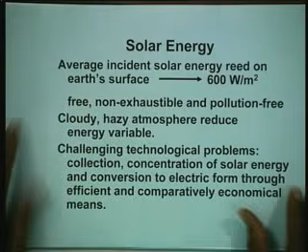So let's start with solar. As I have been telling you all these days, solar is the mother of all energy, be it thermal, hydro, wind, everything. Solar is mainly responsible. In fact, if you remove the sun, pralaya will come. Pralaya is the doomsday, the final day.

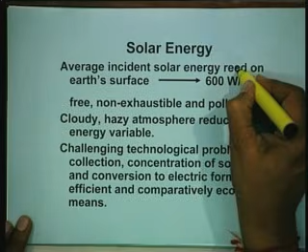Average incident solar energy received on Earth's surface is 600 watts per meter squared. It's quite a lot of energy, and the beauty is it is free. You don't have to pay a single paisa, single cent, single dollar for that. It's non-exhaustible, it will not stop coming after some time, it keeps coming all the time, and it's pollution free, absolutely pollution free. There is no pollution. Only problem is, as I said, not everything is plus with anything.

There are cloudy days. For example, in England, there is hardly any sunny day, and when there is a sunny day, they become so happy. Everybody goes towards beaches and enjoys, saying 'oh, it's a sunny day.' Here, every day is a sunny day.

Hazy atmosphere is another issue. For example, in a place like Rajasthan, if you get a thunderstorm and a windstorm, then the visibility goes down, and on certain days you have to start your vehicle headlights even in daytime. That reduces the energy available. It won't remain 600 watts per meter square on such days when there are clouds, it's raining, or there is a storm.

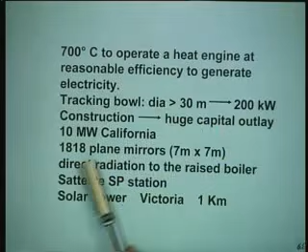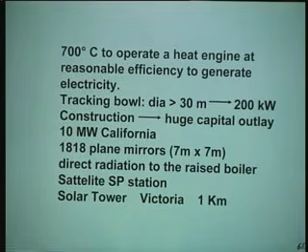1818 plane mirrors, look at the size, 7 meter by 7 meter, direct radiation to the raised boiler, and the steam is formed. All this energy is directed towards that raised boiler. The water gets heated because of the solar heat, and you get steam. Once you have steam, then you know how to go about it. Just pass it to the turbine, and then there is a generator and power is there. This is a solar thermal power station.

There is a satellite solar power station.

What is the beauty of satellite solar power station? Sun is there throughout 24 hours. There is no sunset, as indeed is in Norway and Sweden during summer. The night is only of 2 hours. At 12 o'clock the sun is there, and by 2 or 3 it comes back again.

And the reverse happens in winter. There is hardly any sun for 2-3 hours. Even in Calcutta, our country, by 4 p.m. the sun goes down in winter time. It is already dark by the time you reach home. Even in our IIT, in winter you will see that by the 5:30 or 5 o'clock class, it will be almost dark.

There is a solar tower concept. In fact, a solar chimney we were trying to build in Jaisalmer with Enron, which was to produce 150 megawatts of power using solar energy. Imagine that tremendous amount of power, 150 megawatts, in Rajasthan.

Now, Victoria is a state in Australia where they are planning to have a 1 kilometer high solar tower, and that was enough to supply the needs of Victoria state. Mind it, the population of whole of Australia is just 17-18 million, less than Delhi's population, which is now 20 million, 2 crores, at least in daytime. People go and sleep elsewhere in the NCR region at night - Ghaziabad, Faridabad, Gurgaon - they go up to Rewari, Panipat, and Mathura and so on.

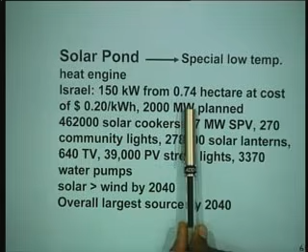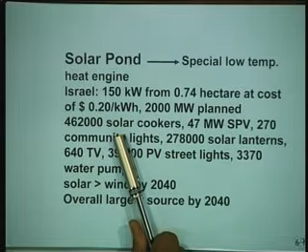It is given there: Israel produces 150 kilowatts from 0.74 hectares at a cost of 20 cents per kilowatt hour, which is very cheap. 20 cents is nothing - even if you convert into rupees, it will be 4 rupees. And 2000 megawatts is planned using this, which should be enough for most needs of Israel.

We do not have a solar pond as such in India, but on an experimental basis we do have a few, not for commercial power generation. It is only a pilot plant. Of course, a lot of theoretical research is going on.

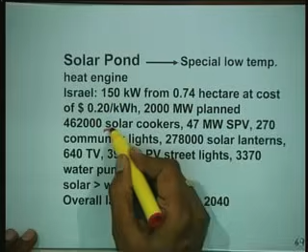Solar cookers, this is very important. Many people have solar cookers in their houses. We have one in the lab of Professor Malik. You can go and have a look at that. You might have done the lab already, or maybe you will be doing it next semester.

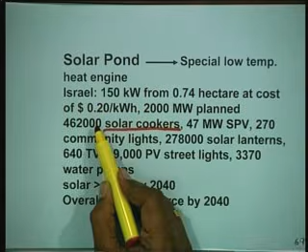What is the importance of solar cooker? No fuel is used, just a mirror and a blackened surface. You can prepare rice, dal, sabji, kheer, or anything except chapatis. Earlier there was a joke that if you want lunch, maybe by dinner time you may have it ready, but now it gets prepared at lunch time itself.

Now imagine how many people must be saving. The saving of LPG, saving of wood, saving of kerosene is also indirectly helping reduce pollution and reduce cost. Which cost? The import bill of petroleum products - that is the biggest check the Indian government signs in dollars for payment, the oil import, petroleum products import. So that can be reduced if you use more and more renewable energy or energy produced indigenously.

47 megawatt solar PV, photovoltaic - that is the installed capacity today. Now do not worry, 47 is not a small amount, it is a big amount. 270 community lights - if you visit Osmania University campus, the whole campus is lit by solar photovoltaic. Anybody from Osmania here? Is it true, whatever I am saying?

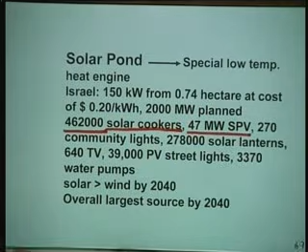There are 270 community lights using a lantern called the solar lantern. No kerosene oil, no wax, no candles needed, just a small photovoltaic panel, and it burns for hours. It's very cheap, not costly.

You may ask where all these things are available. The Government of India, through MNES, the Ministry of Non-Conventional Energy Sources, has opened outlets in 36 cities in India. In New Delhi, it's close to Connaught Place near Shivaji Stadium, from where bus 620 starts for your hostel gate or IIT gate. There is a big shop called Aditya. Aditya in Sanskrit means Surya, sun, and all solar devices are available there. If you happen to go to Connaught Place, do visit that Aditya shop and find out what devices are available and at what price.

These solar lanterns and community lights on streets are fixed, but a solar lantern you can carry like a torch, from one room to another. And if the power goes, which happens quite often in India, anywhere from 4 to 5 hours to 8 hours per day, you can use these solar lanterns rather than inverters, batteries, kerosene lamps, or any other device.

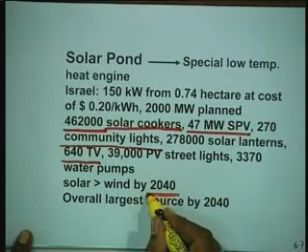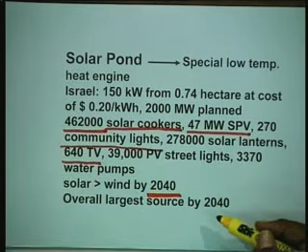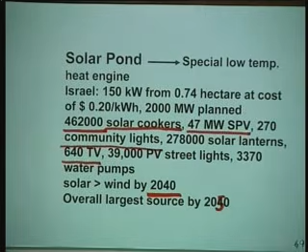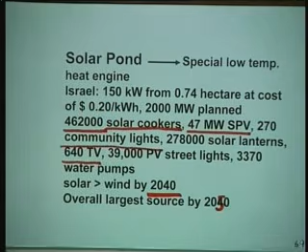Now, solar is going to overtake wind by 2040. All of you will be there to see that, though of course I will not be, that's for sure. Another estimate says the overall largest source will be by 2050, not 2040. By 2040 it will overtake wind, and by 2050, the midpoint of this century, the new millennium will be half over by that time. This is of course a guess, an estimate, but it will be the largest source for generating power by 2050. So you can take this as futuristic, showing how much solar is going to be used more and more in the future.

PV. I introduced rooftop wind power stations to you last Friday, if you recall, and I also told you that rooftops are no longer used for anything else. People don't sleep there at night, children no longer play there, because the rooftop doesn't belong to one particular flat, and sometimes you don't know who has the key to go up there. There are so many flats, and you can't go to all 12 flats to inquire about the key. And in the daytime, nobody is there, everyone's gone to work.

So we have a rooftop PV plant, and please understand there is a synergy building here. The Sip and Bite restaurant is there, you must have visited it by now. If you go to the top, to the roof, a 1 crore rupee worth rooftop PV plant is installed there by Energy Center. It is worthwhile to go and visit that plant and see how it is generating power. That plant is supposed to feed back and satisfy the needs of that building.

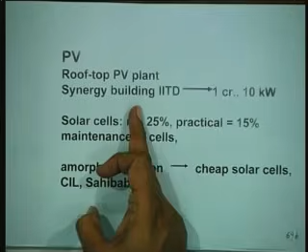We have the NIIT office there, we have 2 canteens, one by KLS, another Government of India, that is the IIT canteen, the ground floor for employees, and some other offices. There is biotechnology also, now there is a lift too, and we can satisfy the needs of that building using that power, 10 kilowatt. It's already written there: Synergy building, IIT Delhi, 1 crore, 10 kilowatt, everything is written there.

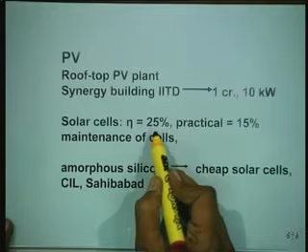Solar cell efficiency, when they started, was hardly 10%. People were saying throw them away, no use, 10% is very low. Look, now we have reached 25% theoretical and 15% practical. It is good, 15%. Solar cells are being manufactured at CIL,

Sahibabad. Sahibabad is close to Ghaziabad. If you go by metro train, use it, you will get Sahibabad after Shahdara. So you have to change it again.

Now, what has happened in the past so many years that has improved the efficiency? Material technology. What are the 4 important areas which have made tremendous progress and changed the world in the last 50 years? Instrumentation, energy, material science, computer science or electronics. Electronics is, computer is nothing without electronics. If there is no chip, there is no computer. So these 4 areas, of course plus bio, 5 areas have changed the world.

Earlier doctors had nothing to do with mathematics, now they know mathematics, they have to learn it because of computers. Engineers have to learn biology because of biosciences, biotechnology, biomedical, biochemical, biomass, even in energy we have bio.

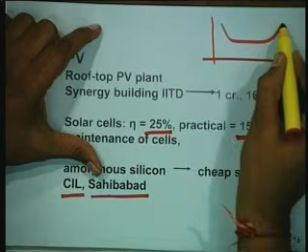I do not know how many of you know there is a bathtub curve. This bathtub you must have seen in movies and TV serials where most of the murders take place. We can't take a bath in a bathtub in a normal house, the bathroom itself is so small it won't allow any bathtub to enter. But if you see movies and 5-star hotels, there is a bathtub.

This curve is between lambda and T. What is lambda? Failure rate. Those of you who have done reliability engineering, or maybe someone in energy has talked about it. It consists of 3 parts: this is the debugging period, this is the normal running useful lifespan, and this is the wear out period.

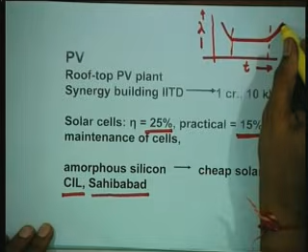Why does it start with a higher lambda, higher failure rate? Because it is new. How do you test your bulb when you purchase it from the market? Either the shopkeeper himself will test it before you take it. You remember the 2 shops in your hostel area, or there are many. He checks it and gives it to you, then it is not his responsibility. Why? If the bulb has to fuse, that is the first instance when it will fuse. If it does not fuse at that time, it will work for some time, even if it is Indian made.

A baby, you must have all, you yourselves were babies once.

The first year of a baby is very important. Your grandmother or grandfather will say in the first summer or first winter, cover his ears, you will catch cold, in summer you will get flu. Why? Because the baby is new to the world and has not faced summer or winter before. It is the first time he is going through it.

However big the players, whether Gavaskar or Tendulkar, on the very first ball of their test career they must be shaky, because it is an unknown commodity. Ranji is different and test cricket is an entirely different ball game. But later there is no problem, they become seasoned.

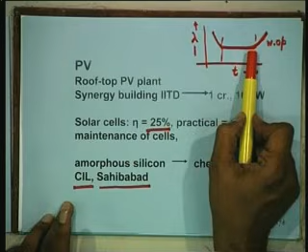That is why the failure rate starts at a higher rate, then settles down, and then there is a useful lifespan. This is having a constant lambda. The assumption is that you are maintaining it, but in India you do not maintain it, so you do not get the bathtub curve at all. Then there is a wear out period. Once the useful lifespan is over, once your ink is finished, you throw the pen or take a refill. Nowadays nobody cares for a refill, you just throw it away and take another.

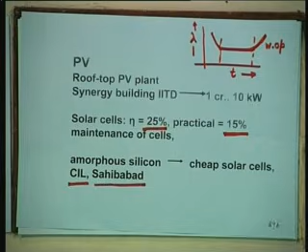Yes, these are the materials I was talking about. The amorphous silicon has reduced the cost of the cell and increased the efficiency of the cell. Now we have cheaper solar cells available in the market.

There is a solar car. Of course, you need a lot of space. And to promote solar energy, Australia is one of those countries which is very much for renewable energy.

You can all go for a PhD in any Australian university. There is a very strong energy program in Australian universities, in Perth, in Melbourne, and Sydney and Canberra, of course the capital of Australia.

So there is a solar car race every year organized in Australia from Sydney to Perth, and the road is straight, you don't have to use your steering wheel, just to promote it. Only thing is, only 2 persons can sit in such a big car. The space is a problem.

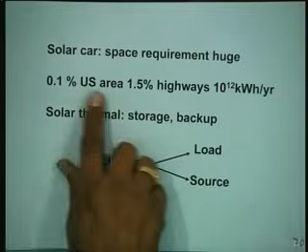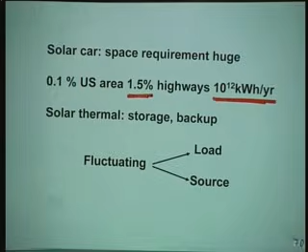Just to give you an idea how much space is required to generate solar power, 0.1% of US area is required if you want to generate 10 raised to power 12 kilowatt hours per year. And please understand, 1.5% of area is used for highways in the US. There are highways and freeways. We don't have freeways in our country. Freeways means there is no signal there, you just start and go quickly to anywhere in that city.

Solar thermal, you need storage and backup in any renewable energy. Why? As I said, wind is there and wind is not there, water is there and water is not there, sun is there and sun is not there. But you can't stop your working, your machines, your studies just because the sun is not there. So you have to have storage or a backup.

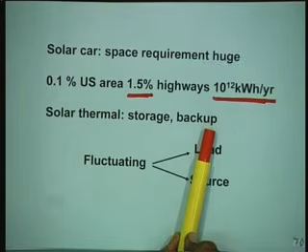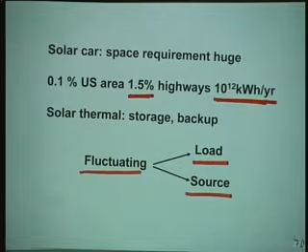What makes energy engineering a challenging field? The load is also fluctuating and our renewable energy sources are also fluctuating. So it is a very deadly combination. Both things are fluctuating, and your job is to keep a balance.

Now with this we finish solar energy. Of course, it is only a general idea. If you want the full details, I think there are courses on solar energy in our energy program, and I am sure all of you must be going through that. This is just to introduce that, mainly from a power generation point of view. I can only tell you a few more things about solar energy.

Solar housing, the buildings nowadays use solar passive and active principles, and Himachal Pradesh is the first state in the country where if you want a loan for house building, the condition is you will use solar energy, and the whole construction will be such that you have more and more solar energy available in the house. The tragedy in 5-star hotels, or in your houses, is that we put thick curtains and do not allow natural light to come in, and then start artificial lighting.

So you are losing on 2 accounts. You are wasting energy, you are paying for extra energy, and the natural energy which is very good, you are preventing. Especially since that can keep you warm in winter, rather than starting heaters, gas heaters, or air conditioning.

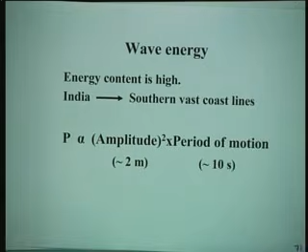There are two institutions in India where a lot of work is going on in wave energy, sea energy, and tidal energy. One is in Goa, which was just selected as a city for film festivals, because world over institutions are known by the cities they're in, like Cannes Film Festival. So Goa is also known for the Institute of Oceanography, where this ocean work happens.

Similarly, IIT Madras. How did this energy center start in IIT Delhi? There was a committee chaired by late Professor Nayudamma, who was Director General of CSIR. The current DG is Mashelkar. Previous to that was Professor Joshi, who is currently Chairman of the Board of Governors at IIT Roorkee. His brother is in the Energy Center, Dr. J.C. Joshi.

Now, Nayudamma was given the task of creating centers, one in each IIT. At that time there were only 5 IITs, and each should be a national center, a center of prominence and eminence, and the whole world should look towards those centers for good work.

IIT Kanpur got material science, IIT Bombay got a resource center, Madras got oceanography, so there is a center there. Kharagpur got the cryogenic center, and the energy center was given to IIT Delhi. Other centers exist elsewhere too, but this is a center of national importance. That is why you see 30 persons there - 30 professors or faculty members versus 5 or 10 in other centers.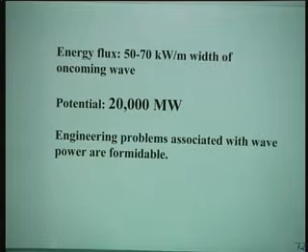Engineering problems with wave power are formidable. However, they are trying at a few spots, and let us see if they can succeed, then they can repeat it elsewhere. I will tell you the name of the spots in a few minutes.

Have you heard of OTEC, Ocean Thermal Energy Conversion? This is world's largest solar collector. The ocean - 3/4 of the earth is water, only 1/4 is land. A temperature difference of 20 degrees centigrade between warm solar-absorbing surface water and cooler bottom water can occur.

As I told you, in earth if you go below, you will feel hotter and hotter. If you go up in air, higher you go, cooler you feel - there is a proverb about this. Similar thing happens in the ocean, sea. If you go down, it is cooler, and the surface water is a bit warm. Those of you who can dive will understand this much better. Do not go and take a dive unless you know how to swim.

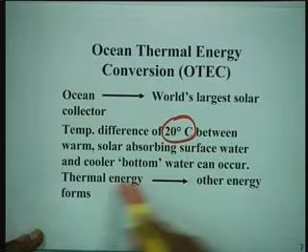A temperature difference of 20 degrees centigrade is big enough to create a gradient and generate power, and thermal energy can be converted into other energy forms. Again, this potential is vast - 50,000 megawatt. In the US, in Miami, as I was telling you, temperature difference is 17.5 degrees centigrade, and they are generating power.

In India, we are considering Kovalam Beach as a probable site. As I already mentioned, Goa and IIT Madras are oceanographic centers. Where is Kovalam? It is 14 kilometers from Trivandrum as you go towards Kanyakumari, from Kerala to Tamil Nadu. Kanyakumari is in Tamil Nadu, Trivandrum is the capital of Kerala, and Kovalam Beach is a world-famous beach. Tourists come and go there, and they are trying to develop a power station there. If it becomes a success, they can repeat it elsewhere.

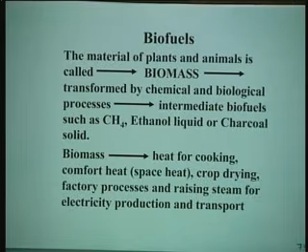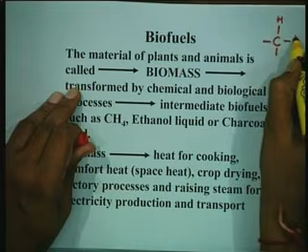Biofuels - we were talking about bio some time back. The material of plants and animals is called biomass, transformed by chemical and biological processes into intermediate biofuels such as methane. I hope you have not forgotten your chemistry - CH4 is methane, you must have written this formula in your chemistry course. Carbon has valency 4, so there are 4 hydrogen atoms. Acetylene is C2H2, if you recall.

Second, some people mix cow dung with water and sprinkle it in front of the house - it seems to keep the environment cool and clean. It still happens in villages. Yes, it gives you heat for cooking. There are a few colonies in Delhi where biogas is being supplied rather than LPG for cooking, and it is very cheap. There are biogas community plants in villages, and individual plants too, which can give you light, gas to cook, and so on.

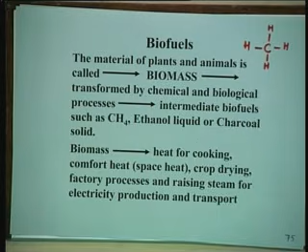I think Professor Gadgil may be teaching you biofuels, or Professor Dastidar, D.K. Sharma. These are all guys who are experts in biomass, the so-called chemical engineers. They are chemists.

Potential is 17,000 megawatt. It's worth exploiting it, worth tapping it. Agriculture waste, the waste I have been repeating earlier on, should become our primary source and we have to use it. What is cow dung? It is supposed to be a bio waste again, which is being converted into fuel. Now agriculture waste is 6,000 megawatt available. The total biomass power harnessed so far is 222 megawatt, a very good figure.

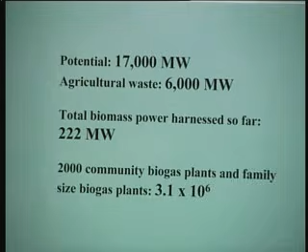2,000 community biogas plants and family size biogas plants of 3.1 million. We have a biogas plant in IIT campus itself, in the mechanical engineering department, in between block 3 and 2 or something like that. You can go and have a look at that.

Rural energy scene. Why should we worry about rural? Why does government talk of rural all the time? It is not only for votes. The fact is India lives in villages. Mahatma Gandhi also said that. How many villages are there in India? Anyone?

7 lakhs, that is 700,000. How many of them have been electrified? Only 85%. That means 15% villages are still there where there is no light, no grid power, they are inaccessible, they are hilly areas, and there is no chance of grid being taken to those areas. There is no money.

Even those 85% which have been electrified, the government definition, or CEA definition, is, if in a lighter vein, a transmission line passes through a village, they declare it to be electrified. That means the transmission line is also not passing in those 15% villages and is unlikely to pass in the coming 10 or 15 years.

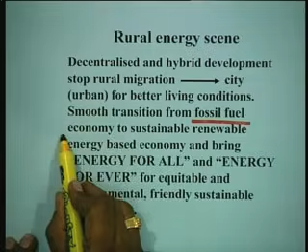Smooth, we want this migration from cities to rural India. Now it is everybody coming to Delhi. Nobody wants to leave Delhi. It's one-way traffic to such metros. We want smooth transition from fossil fuel economy to sustainable, renewable, energy based economy.

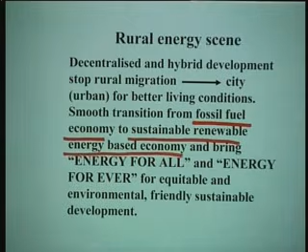That is our future plan, so that we give energy for all and energy forever. These are very good sounding words, whether they will be converted into reality or not, I do not know, because I am not a politician. I am not supposed to say this, 'by 2012 I will do this, and by 2020 you will be a developed country.' Who knows who will be there by 2020?

But it is a good laudable goal, there is no doubt about it, if you can do it. And yes, we can do it, because we have the second largest scientific and technological manpower, we have resources, we have everything. Only what is lacking is a will to do that.

What will happen if this happens? We will have an equitable and environmental friendly sustainable development. So, in a way, it will be poverty alleviation. Why is there poverty? Because there are no opportunities, there are no jobs.

Once you have power, once you have education, you will get the opportunity to work. You do not have to unnecessarily go to cities or outside India or wherever. One is free to go, of course, but does not have to go necessarily for making both ends meet.

I think with this I want you to ask some questions on today. Today we have done solar energy, we have done wave energy, we have done biomass, biogas, all these things, and tomorrow we have a class, we will start with energy storage. So if there are any questions on whatever we have done so far, ask now; if not, then we will stop here. Thank you.